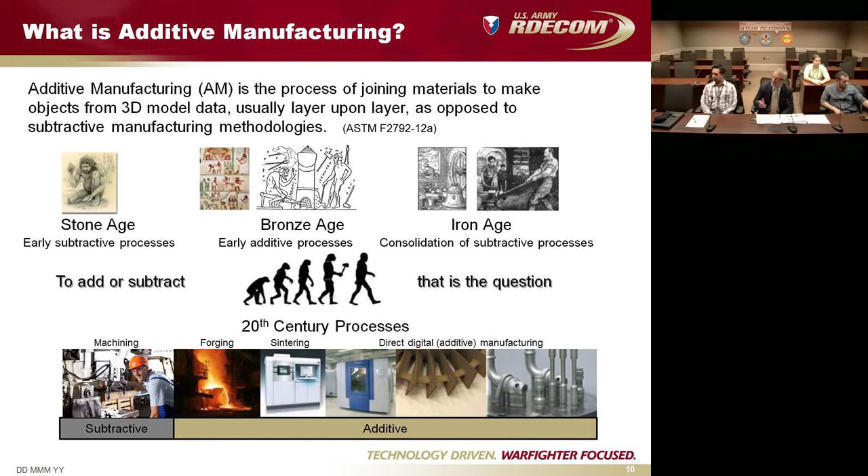So what we have is many technologies that I'm sure most of the people in the audience are familiar with, but the ASTM F2792-12A defines the additive technologies we'll be discussing today as: powder bed fusion, directed energy deposition, material extrusion, vat polymerization, material or binder jetting, and sheet lamination. So go on to the next slide.

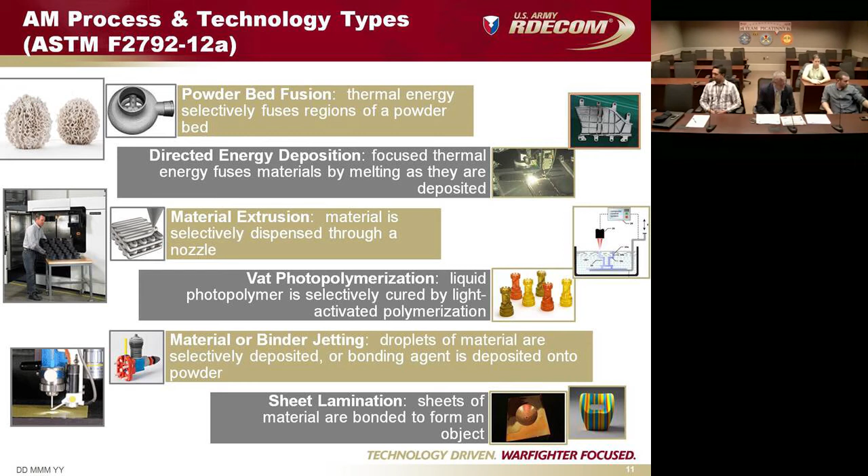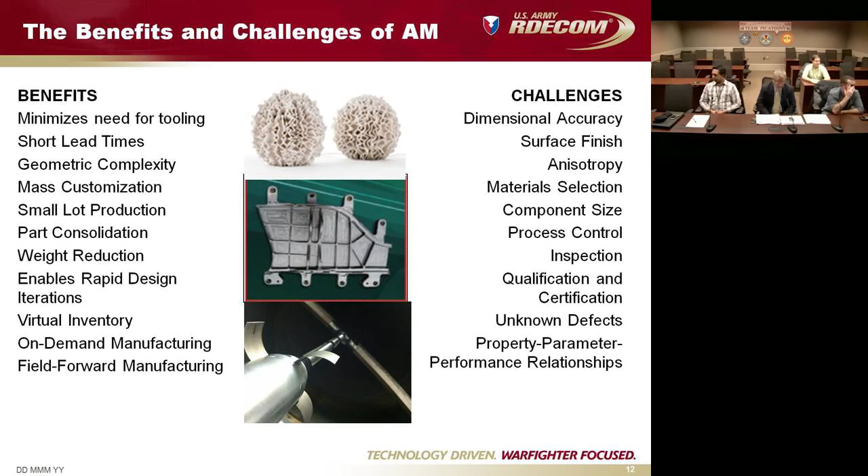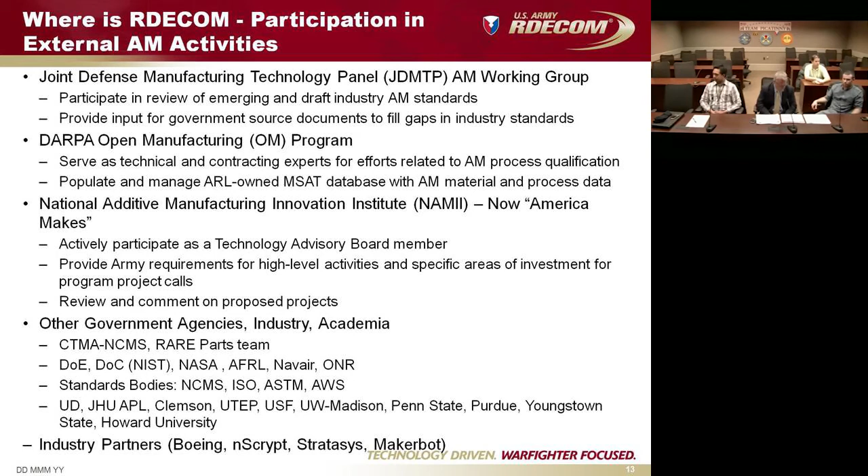We're working with DARPA and Open Manufacturing, a program looking to have a virtual connectivity of the industrial base, and other programs like NAMII, the President's America Makes program. We're participating as a technology advisory board, providing the technologies needed for this specific investment program calls.

You gotta go two slides. Oh, I'm sorry, two slides? Oh, so I'm talking to the wrong slide? Okay, that was a slide ahead, I'm sorry.

The main point of this slide is that within the Army, we touch just about every technology and every manufacturing need there is in industry or anywhere worldwide. We go anywhere from very small fuzes within the munitions world, which is what we do here at RDEC, to UAVs, UGVs, helicopters, and individual soldiers.

So there isn't any manufacturing need that's not represented by an Army system. That gives us a lot of opportunity to find test cases that will give additive the springboard it needs to go forward, solve real problems, and be the market driver to open up more opportunities.

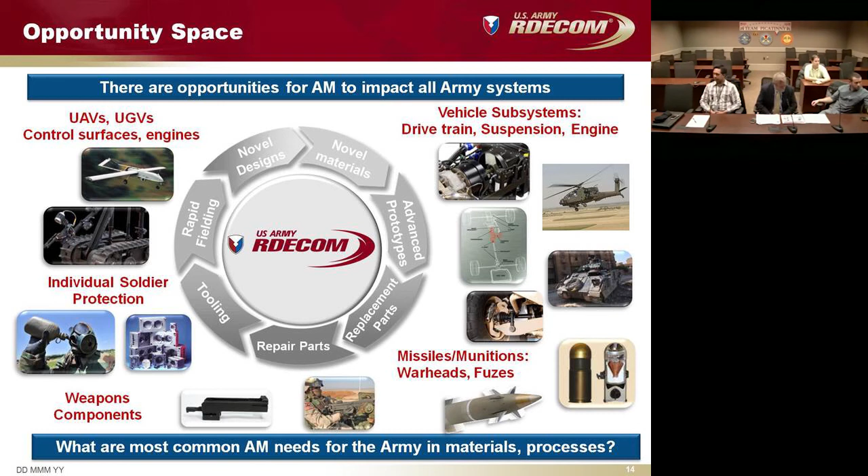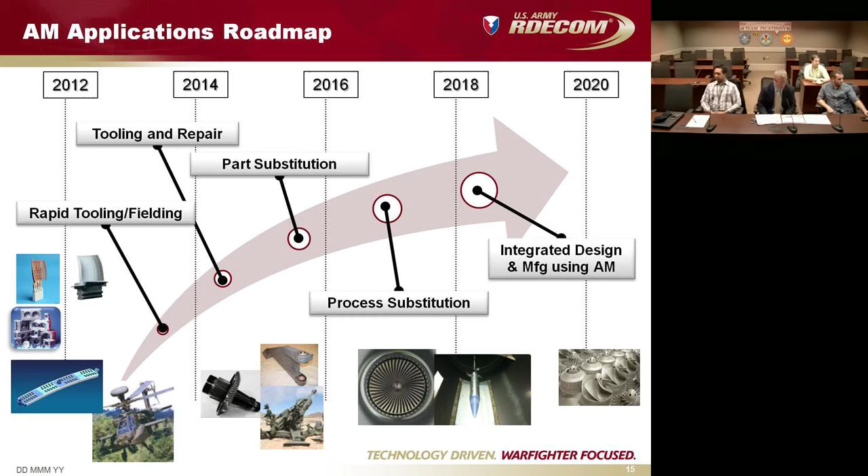You could take a step back and look at the functionality of a fuze, or this fabricated part in a munition. What train has to be done for safe and arm? How can we take advantage of this new capability where, using old techniques, these parts were not producible, but now with this new technique, they are? So how do we redefine our designs and move forward to get something totally new to meet that space?

We always looked at ourselves to be the front end of the industrial base. We are the engineering support activity for the PMs in that vein of engineering. We have the product knowledge all the way from concept, through development to full-scale production, and once it's out of production, to how the depot work and maintenance requirements are put together to meet the objectives of the requirements of that system.

So in that role, we're just trying to see, okay, how does additive fit into that total lifecycle engineering problem? Once we understand that, how do we help direct Mantech or other Army investments, and how can we leverage opportunities from other sources?

You look at like GE in their helicopter engine plant, they're investing $3.2 billion into their new processes for the new engine, to include additive. It's very hard for the Army to throw that type of investment at any particular area. So how do we exploit what's going on in industry and marry it with what we need in the Army?

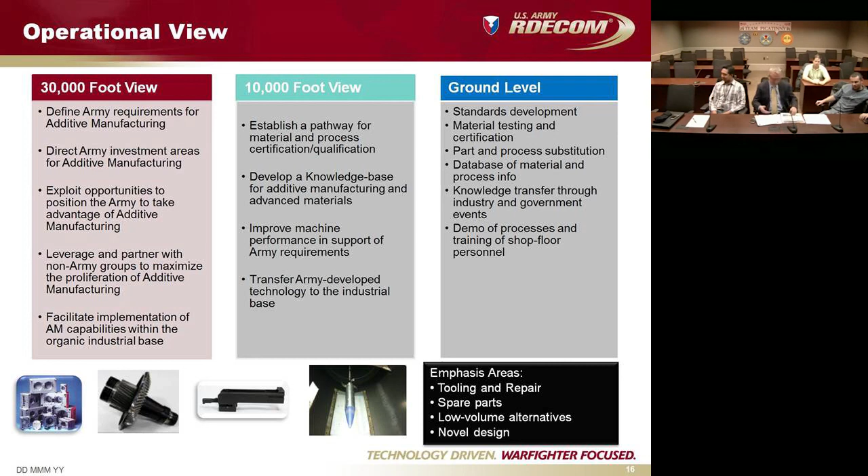Go to the next slide. Am I running out of time? That's why I'm off the screen. No, you're good, okay.

So in summary, and then I'm going to go on to some of the backup slides if we could. We all understand that additive is an enabling technology. We've been through enabling technologies many times in our history as a manufacturing community and as a government, and we know how to bring a new technology forward. We're just hoping we can expedite that a little bit faster than in the past, but this is nothing new, and we as a community can do that.

I'm sorry, someone else is on. I'm getting a lot of back talk. Okay.

Additive manufacturing aligns with our goals. Right now we've done a lot of rapid fielding and prototyping in support of the warfighter, and additive is one way for us to do that, giving an initial prototype demonstration to the soldier directly in the field of what we can do with a technology solution. So we feel that additive is actually critical to the asymmetrical warfare threat. If we have an ever-changing enemy, how do we change quickly, or give some kind of evolutionary change to one of our existing products to meet that new threat? Additive gives us that quick capability.

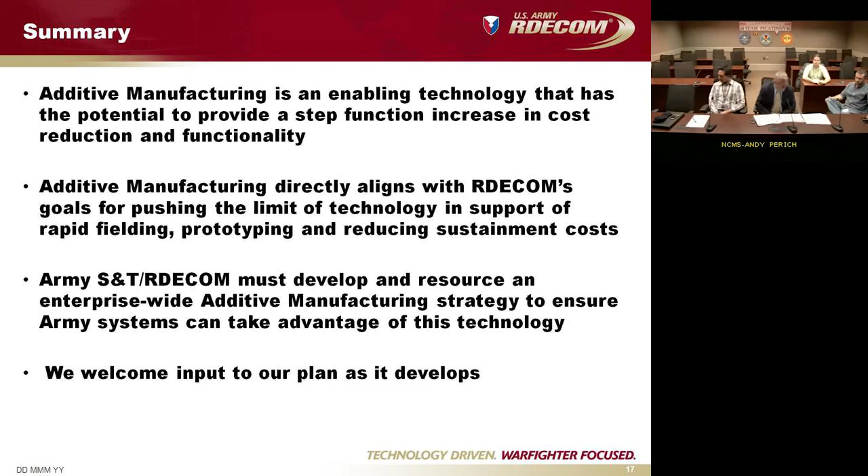I just wanted to show that we're working on a lot of industry and working groups. I'm stressing this because I think it's very critical to making additive a reality. So if there's anything in the message that should have gotten across to Steve Luckowski and our RDECOM headquarters, it was to make the point that it's the certification that's our biggest inhibitor to going forward right now, and the qualification, in making this a reality. All right, so with that I'll stop and let you move on.